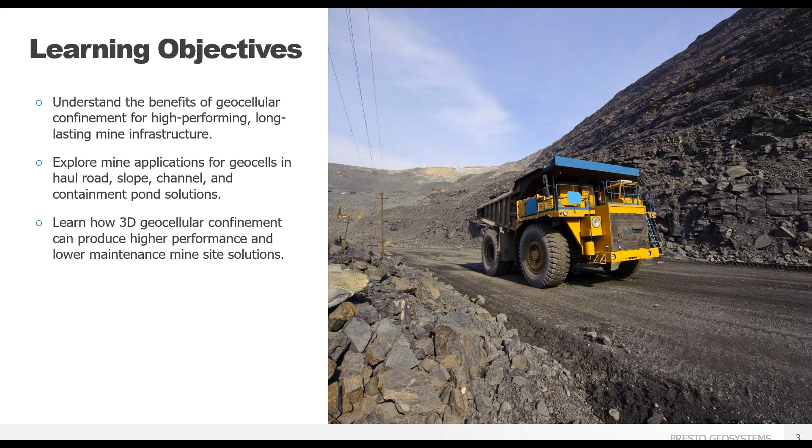The 3D GeoWeb cellular confinement system is perfect for the mine industry as it stabilizes unstable soils vertically and horizontally in the applications of load support, slope protection, channel armoring, and earth retention.

Today's presentation will focus on permanent and economical solutions with the GeoWeb system for a number of challenges facing the mine industry: stabilization of soft soils for access to site and haul roads, control and contain rainwater, protection of geomembranes in basins, tailings, and leach pads, and reclamation of slopes at mine closure.

Through 3D confinement and by strengthening the fill, less material is required and waste rock can be beneficially reused on site. The GeoWeb system offers improvements in operation, maintenance, installation, and safety at a lower total cost, giving your mine site some powerful value engineering solutions.

The GeoWeb system is our version of geocell technology and consists of two main attributes. The first is the cell size. The cells come in three diameters: small, medium, and large, and varying cell depths. Cell sizes are selected following an evaluation of project-specific needs and site conditions.

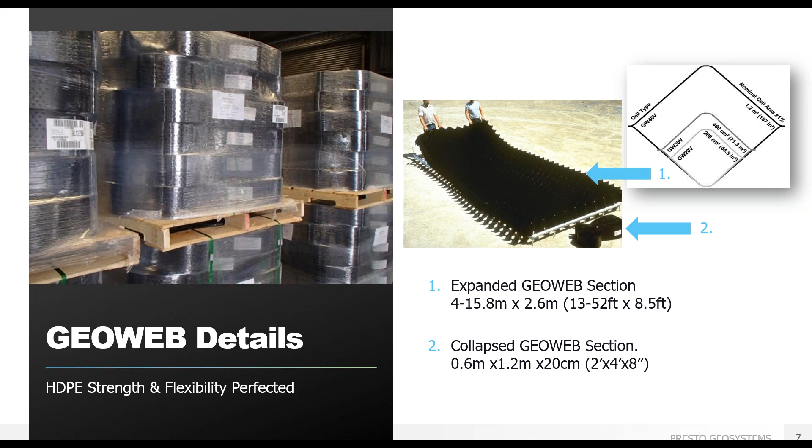The infill, or what you put into the container, is the second important attribute of a GeoWeb system. An important benefit is that low-quality aggregates, sand, or on-site reclaimed material can all be used to infill the geocells. Using reclaimed sand or aggregates can save a significant amount of money on materials and transportation costs.

We can also remove fines if drainage is desired, as the geocells provide the confinement and aid compaction of cohesionless soils. Without fines, we can significantly improve drainage and let water flow freely through the system, preventing pore pressure buildup and overall cross-section failure. The ability to use these low-quality sands and aggregates with friction angles in the 20-degree range really sets the GeoWeb system apart from geogrids and other geotextiles.

Those products require high-quality materials with high friction angles to achieve their optimal performance. With the GeoWeb system, materials with low friction angles are fine, as the GeoWeb panels reach their full potential even with these poor materials and can provide significant cost savings. As a value engineering option, the GeoWeb system can often reduce the cross-section required by half.

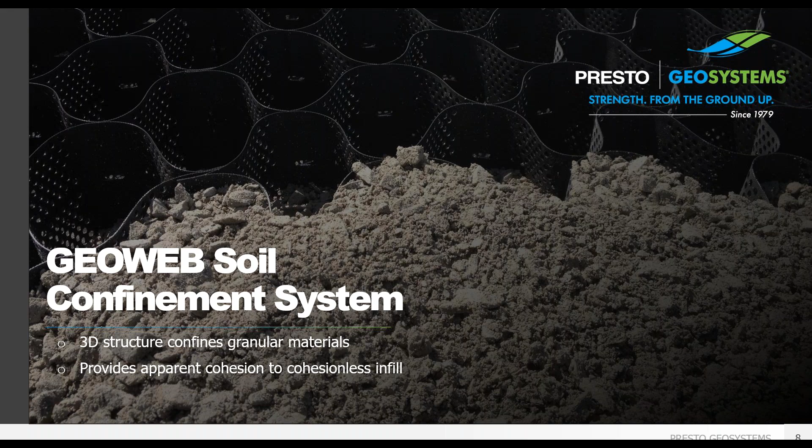The three primary elements of any geocell system—cell walls, internal junctions, and connectors—must perform uniformly as a complete system. So any incremental improvement in one characteristic, like cell wall stiffness or ESCR, is only valuable if a complementary improvement has been made in the other components of the system.

GeoWeb is manufactured using a proprietary blend of high-quality virgin high-density polyethylene, and our proprietary formulation has stood the test of time for over 40 years. For most typical sites, GeoWeb will retain its durability for greater than 100 years, with lab testing indicating 149 years without degradation, even at full exposure to the elements. We stand behind our numbers so you can deliver certainty in the solution and build with quality materials you can trust.

Made from high stability, inert materials, GeoWeb geocells are your permanent stabilization solution and will not degrade, leach, or release microplastics into the environment. GeoWeb does not contain any intentionally added PFAS, and based on this understanding, GeoWeb is not expected to pose a risk of release of PFAS compounds into the environment.

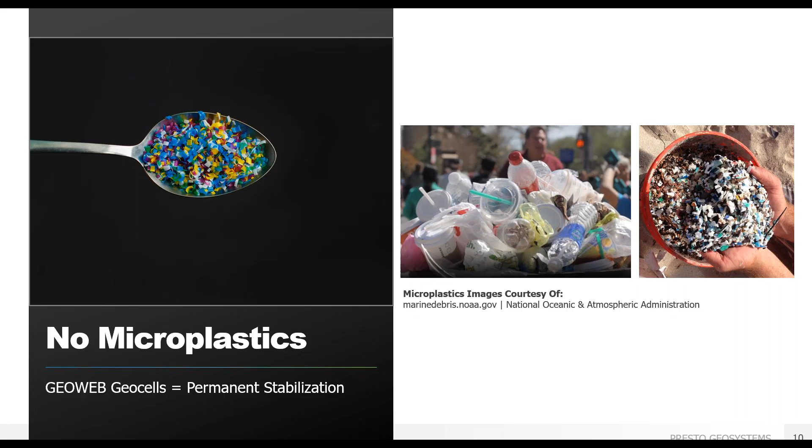Our base resin is the same material used in environmental applications like geomembranes and other environmental barriers to protect against the spread of harmful toxins. And our products have been third-party tested by accredited geosynthetics laboratories, confirming long-term stability against environmental factors such as weathering and oxidation.

Additionally, GeoWeb and our accessories are 100% made in the USA under strict quality assurance and environmental control processes, sure to comply with all requirements for the Build America, Buy America, and the Infrastructure Investment and Jobs Act.

Presto's GeoWeb system is equipped with numerous design and construction components that increase strength and speed of installation, each of them with specific strength values, so calculations and modeling replicate real-world forces, and the solution is designed for the project needs instead of as a commodity one-size-fits-all product.

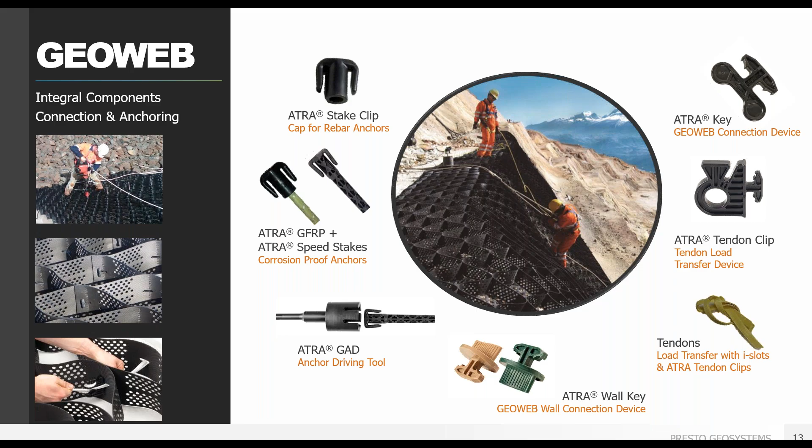These system components are all the supporting pieces that help the GeoWeb protect the surface and base layers, and also ensure relatively uniform performance of the interconnected system, thereby protecting against damaging effects of non-uniform deformation and differential settlement in response to applied loads. These components make it safer, faster, and easier for installation.

The ATRA key is the first component for a completely integrated system, connecting each individual panel of GeoWeb into a single web that covers your slope or channel. It allows for a faster installation of the GeoWeb and will last the lifetime of the project, ensuring your slope is protected and the GeoWeb system will not fail under anticipated loads.

The specific engineering values of the ATRA key will ensure the system holds up to loading over time without corrosion, as seen in staples, or the failure of underperforming cable tie systems. Our spec sheet calls out specific engineering values for this patented connector, and the ATRA key requires no special tools, generators, or compressors, nor any three-handed acrobatics like cable ties or two-piece connectors. All the ATRA key power with a simple insert and turn positive connection.

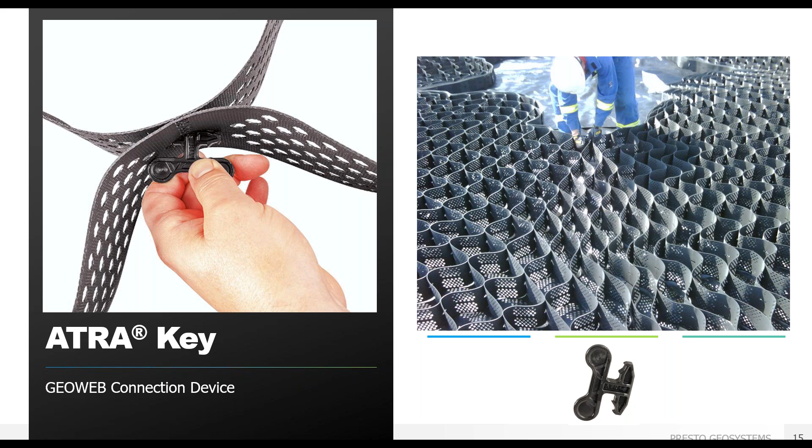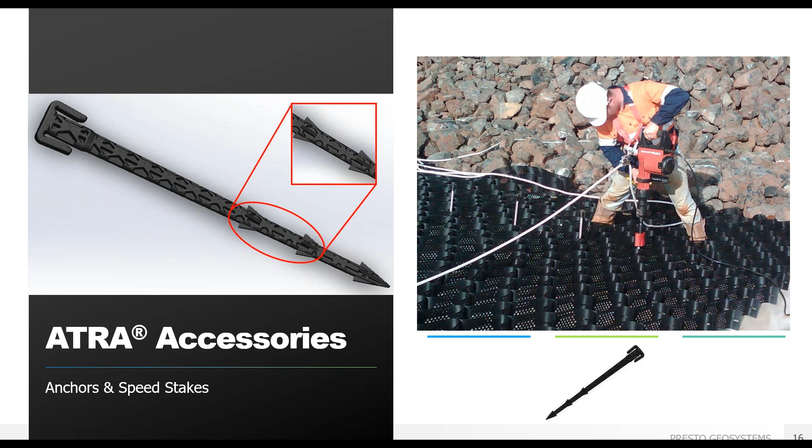As slope angles increase, the driving force of your infill material exceeds the available frictional resisting force, and additional anchorage is required. The ATRA anchors hold the GeoWeb to slope and penetrate into the ground. If corrosion resistance is required due to project conditions, Presto has an HDPE ATRA speed stake designed to work with the GeoWeb and offer higher resistance to extraction than rebar or J-hooks.

For steep slopes, a slope where the native soil is highly erodible, or over a surface that cannot be punctured, such as a liner, tendons can be used. The ATRA tendon clips transfer the load from heavy infill material to the tendons and to the crest anchorage system. Only the ATRA tendon clip is specifically designed to fully transfer safely and securely the forces placed upon the geocell.

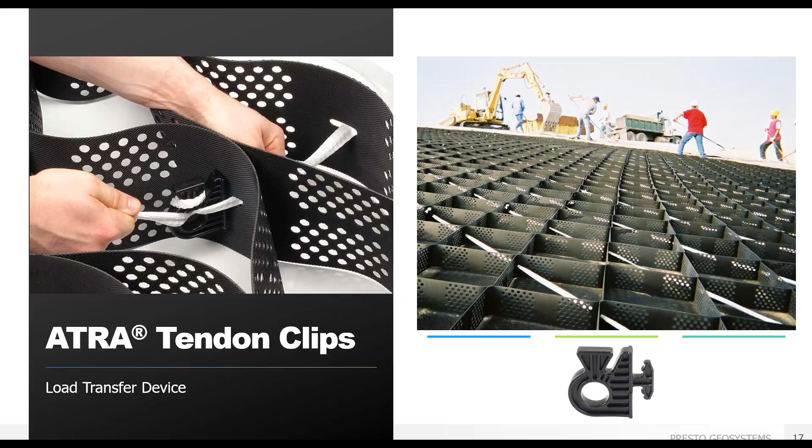Every accessory and every feature has been designed and tested to specifically work together. So we go from problem to design to construction solution with a system where the modeling replicates real-world forces. Now let's talk about how to take advantage of the benefits of geocellular confinement. The first application we'll highlight is load support.

The GeoWeb system stabilizes unstable soils vertically and horizontally, and in load support applications offers various benefits for mine clients.

GeoWeb geocells were invented for supporting heavy loads over soft soils, the perfect solution for haul roads in mine installations. Before giving specific examples with case studies, first we'll explain how and why geocells work so well for load support.

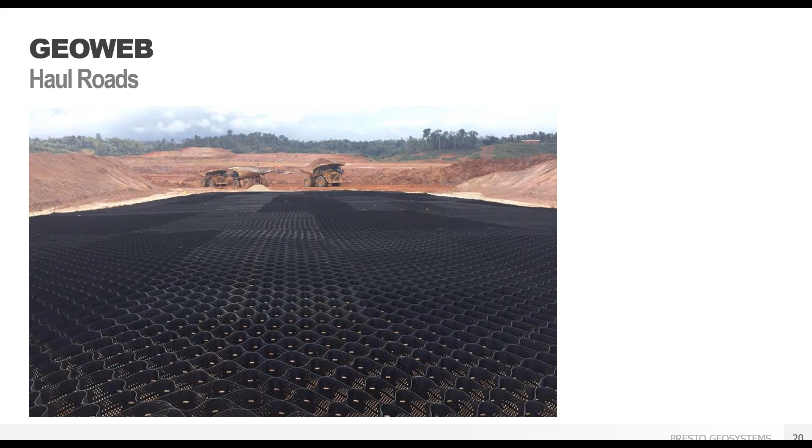GeoWeb was invented for solving a military problem: how to cross beaches with heavy military equipment. The Army sought a quick to deploy road solution, and a Presto engineer, Gary Bach, collaborated with Steve Webster of the Waterways Experiment Station to weld strips of polyethylene and form the first geocells.

The system evolved to include UV stabilization and other improvements such as perforation, texturization, and connections, but the concept of geocellular confinement and the particular strength properties of HDPE have been proven over 4 decades of GeoWeb load support. Likewise with the use of low quality and low friction angle infills.

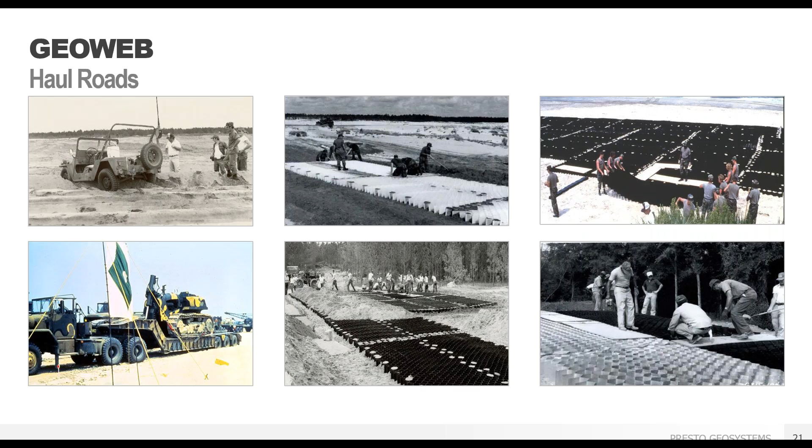This mattress effect reduces the stress reaching the subgrade and leads to a significant decrease in deflection and rutting. Let's get a bit deeper into how that works.

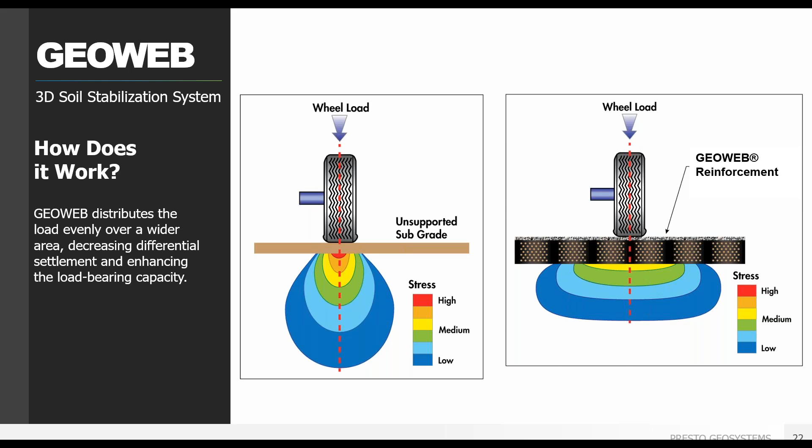GeoWeb geocells can alter the geometry of a soil pressure bulb beneath an applied load through this mattress effect.

When a load is applied to a geocell reinforced layer, lateral earth pressures develop within the infill material, which is confined laterally by the geocell walls against movement, and in turn develop upward shear resistance along the wall interfaces through the interconnected network of cells. In essence, this lateral confinement converts horizontal earth pressures into upward resisting shear forces.

When combined with suitable base reinforcement, such as an enhanced woven geotextile, it becomes possible to construct over very weak subgrade materials, including those with standard penetration resistance values less than 2 blows per foot, which is a CBR value less than 0.5%, where most planar geosynthetic products, such as geogrids, would otherwise fail.

When a vertical load is applied, those active earth pressures in the loaded cell push back against the passive earth pressure in the adjacent cell and form a stable system. Being confined, the soil responds passively.

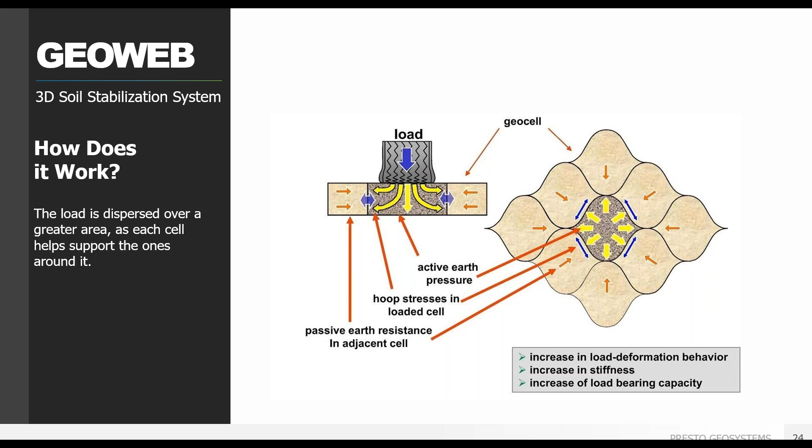By spreading out the load in a classic granular fill approach, you can reduce the compaction of near surface soils, but only with cellular confinement can you assure there's no lateral shifting, which leads to rutting. The mattress effect reduces the stresses reaching the subgrade, and by eliminating that lateral particle movement, the GeoWeb system can stabilize the surface, eliminating your need for constant maintenance.

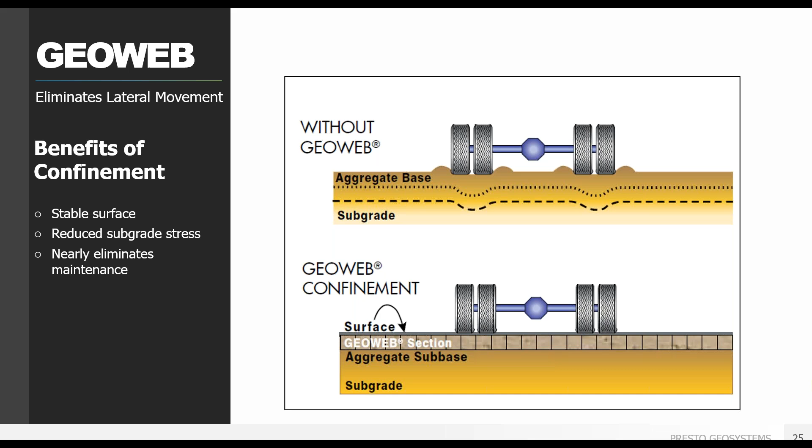We see how the cells push back against each other and support the load, and that only the adjacent cell needs to be filled for this support.

A great benefit to using the GeoWeb system is you do not need to have every cell completely filled before your road is usable. This can reduce construction time and materials, using the road as its own access point for construction.

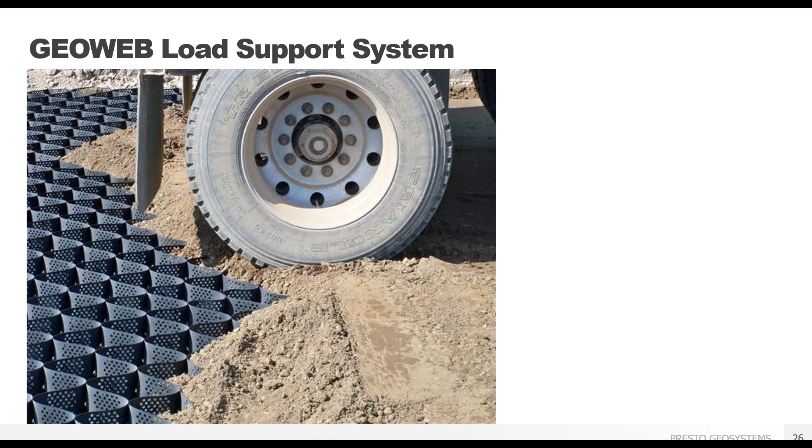GeoWeb provides a system with less rolling resistance, less required maintenance, less expenses needed for fuel, and less structure required to support those loads, all with better production, better cycle times, better operational costs, and a better installation.

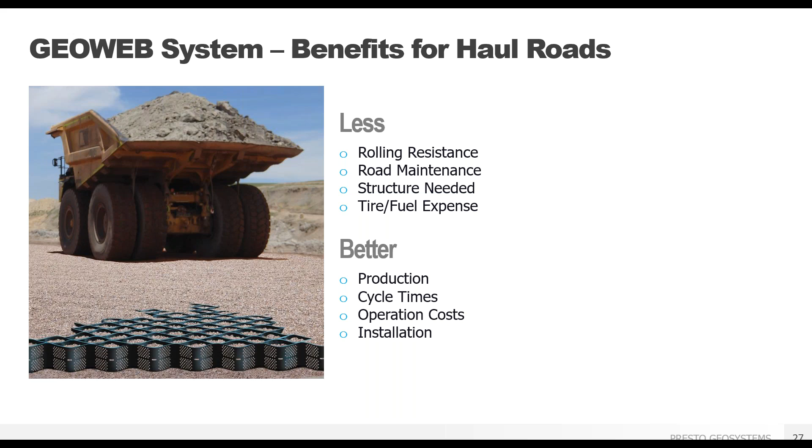A great value engineering solution for your site access and your haul roads.

The 3D structure functions well in remote areas where clean aggregate is scarce. Compact GeoWeb sections ship efficiently to your job site and require less trucks to transport materials.

On-site sand infill is used so that costly aggregates won't be necessary. Nearly any locally available granular infill, sand, and even waste rock can serve for the GeoWeb geocells in your projects.

In the majority of cases, the GeoWeb system can also reduce your cross-section depth by up to 50%.

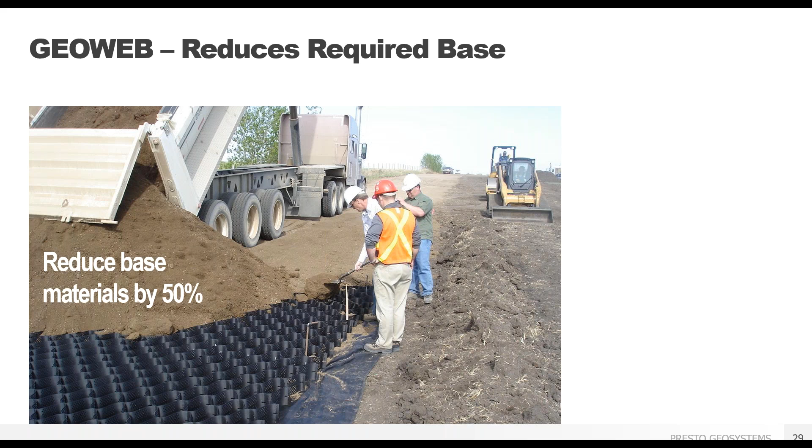GeoWeb allows stabilization with a reduced cross-section, making it ideal for underground haul roads.

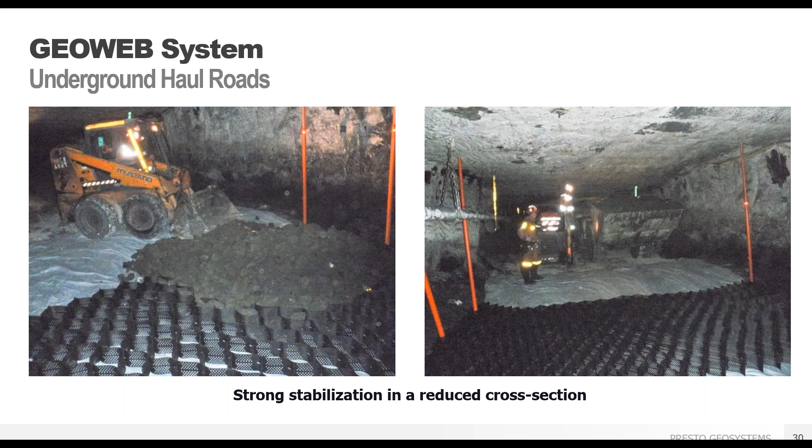Let's look at a specific example for a haul road in a case study. This case study is for a mine site in South America and is a great example of the power of geocells as a value engineering solution.

GeoWeb geocells were incorporated into the design of a haul road at an active mine in Suriname, with heavy loading over soft subgrades and local scarcity of quality angular aggregates as it was the mine startup. The prepared subgrade strength exhibited a California Bearing Ratio value of 2.5%, consisting of saprolite and clay.

Anticipated loading included CAT 785 haul trucks, 275-ton vehicles, and the haul road useful design life of 10 years at 250 movements per day. Surface loading calculated to be 151,750 pounds, with surface contact pressure of 101 pounds per square inch and 55% of the total 550,000 pound weight on the rear axle of the haul trucks.

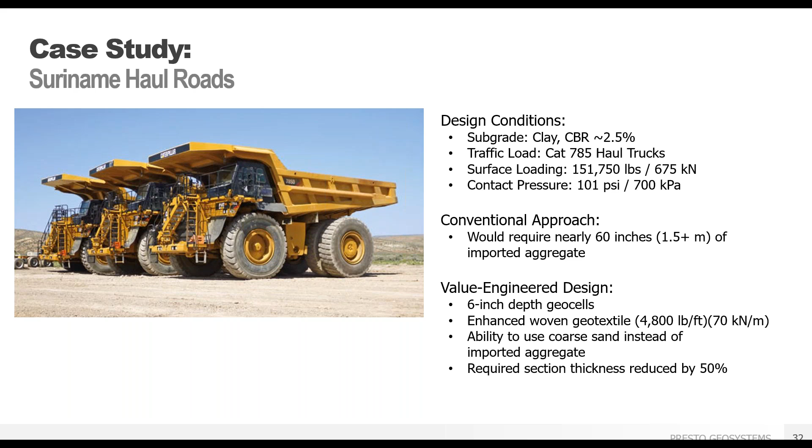GeoCells offered a value engineering design option with multiple benefits. The sticky clay soils made the road impassable with every hard rain, and adequate aggregate materials for a standard construction solution were not to be found.

GeoWeb geocells offered a value engineering option with just one 6-inch layer, or 15-centimeter layer, of geocells being able to support the heavy haul truck loading over soft subgrades and reduce the total thickness from 60 inches suggested by standard design guidelines to 30 inches.

GeoCells dramatically increase the shear resistance of the infill, which allows the use of lower quality fill to carry concentrated loads that would otherwise require crushed aggregate, and prevent localized near-surface shear failure.

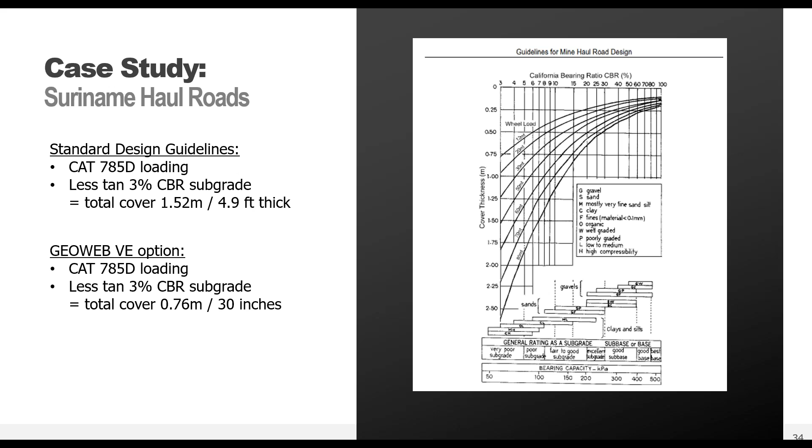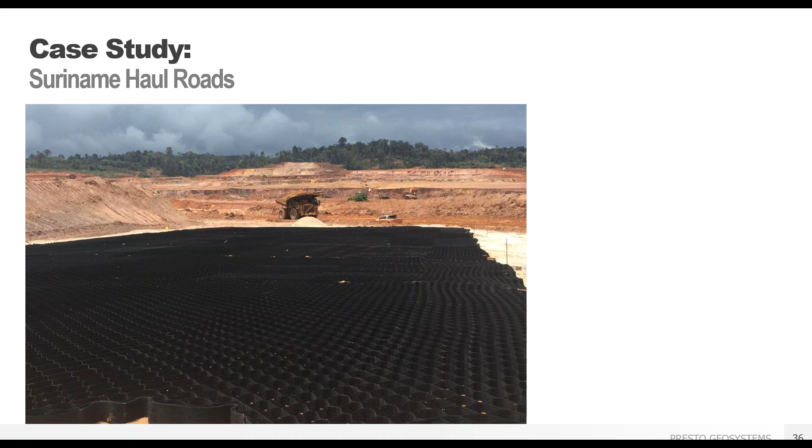And the GeoWeb haul roads function well, even with the hard tropical rains.

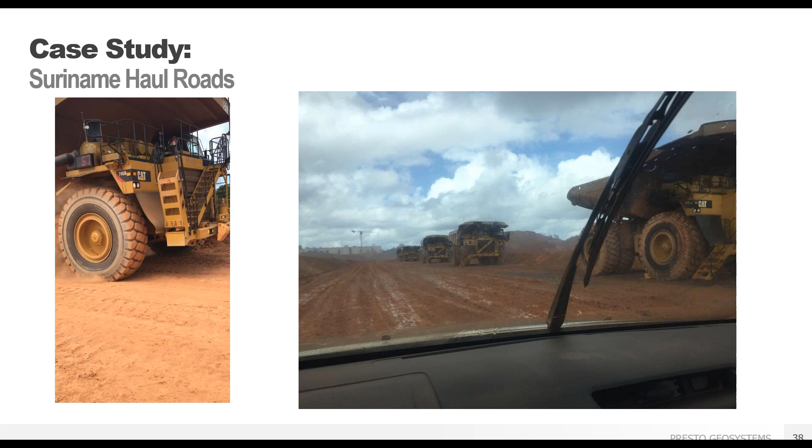The results of the GeoWeb installation offered notable benefits: a great reduction in the total cross-section needed, reducing it by 35% with a coarse sand wear surface and by 50% with an aggregate wear surface.

There's less vehicle maintenance and less fuel required, better productivity, and better operational costs with safer site conditions, and the expansion opened before the scheduled date and under budget. All in all, a very satisfied client.

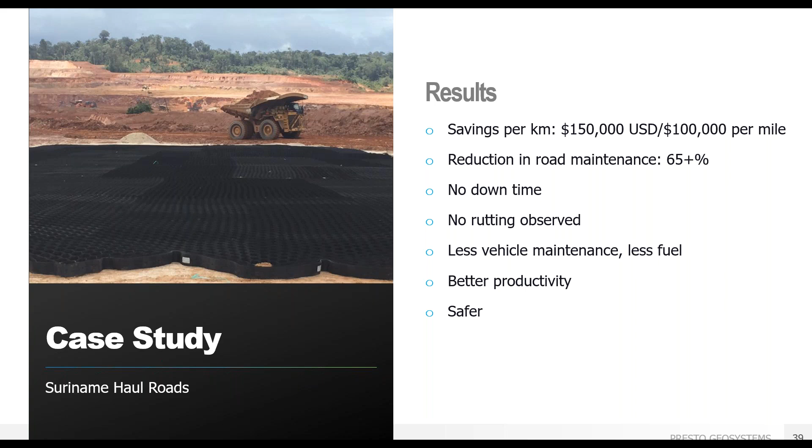Project calculations included an analysis of bearing capacity improvement to evaluate the combined benefits of lateral confinement from the geocells in conjunction with the tension membrane effect of the underlying high-strength woven geotextile, to confirm the proposed approach would meet all the design requirements. The analysis indicated the stabilized section would offer a substantial increase in the allowable bearing capacity over existing subgrade conditions.

Without the geocell system, it would only have an allowable bearing capacity around 20 to 30 psi at best.

An analysis of hoop stresses under the working loads was also performed to verify the geocell system components would be able to withstand the demanding load requirements. Hoop stresses were compared to the ultimate tensile strength of the perforated cell wall, as well as the strengths of the internal and the mechanical junctions.

In the case of the junctions, ultimate strengths for all three primary modes of potential junction failure—shear, peel, and separation or splitting—were compared to the fully developed hoop stress under working loads to calculate factors of safety for each mode. For the cell wall, the factor of safety against cell wall rupture was also calculated.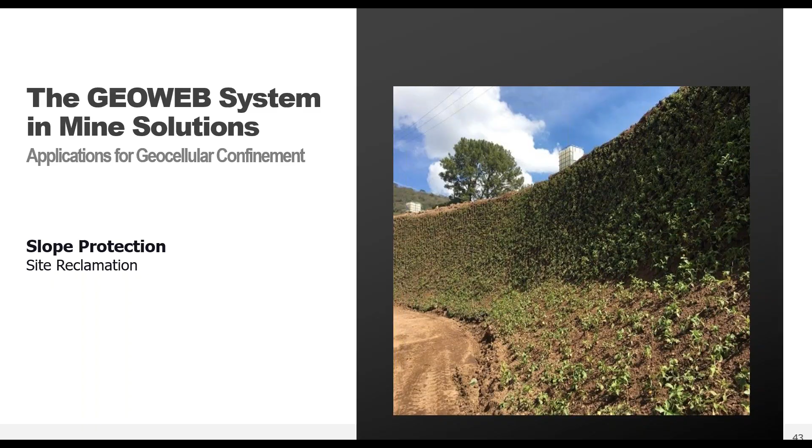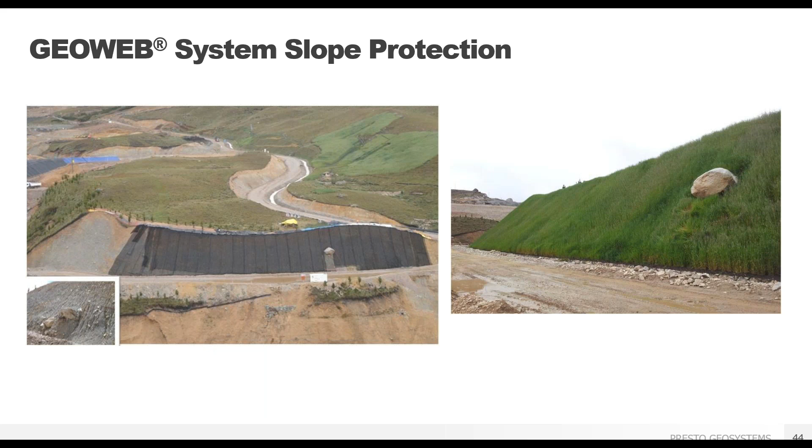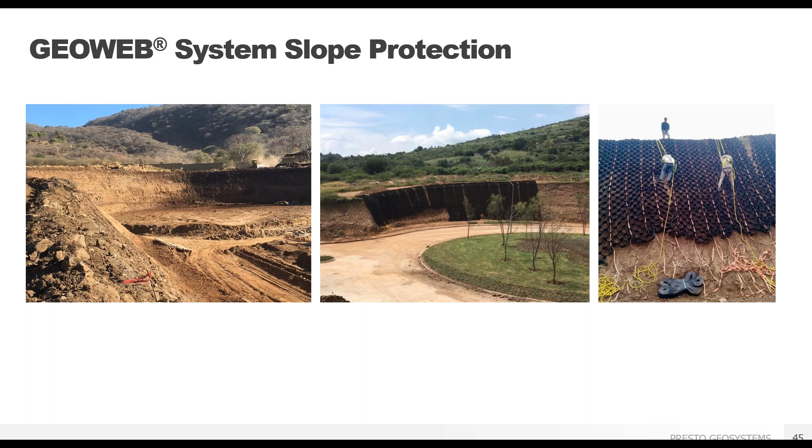The GeoWeb system allows flexibility in a mine slope reclamation solution, and GeoWeb allows vegetation of tall, steep slopes—very steep slopes.

GeoWeb also allows you to suspend a protective layer to vegetate or hard armor over geomembranes without the need to perforate the liner for your anchor system. And as we see here, it's able to sustain vegetation and control erosion as part of that protective layer.

Here's another example of the GeoWeb system with tendons over a geomembrane.

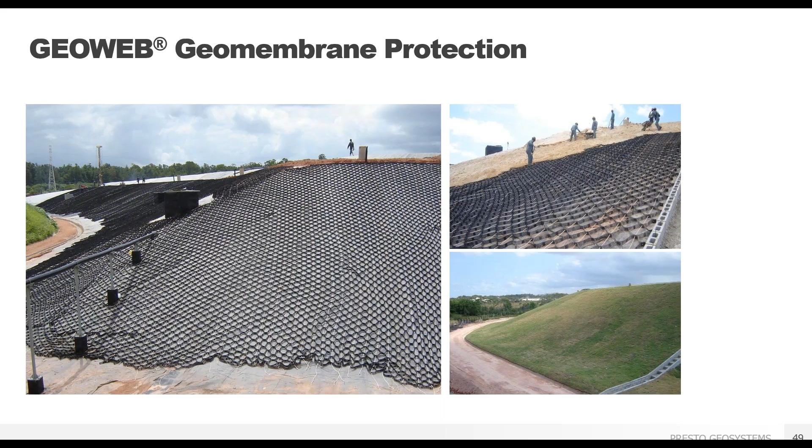The anchor system with ATRA tendon clips allows for a safe and strong installation without the need for stakes or perforation.

The ATRA tendon clips transfer loads from the geocell wall to the tendon, and the tendon to the crest anchorage. Here we see a typical crest anchor as a dead man pipe with the yellow tendons connected to it.

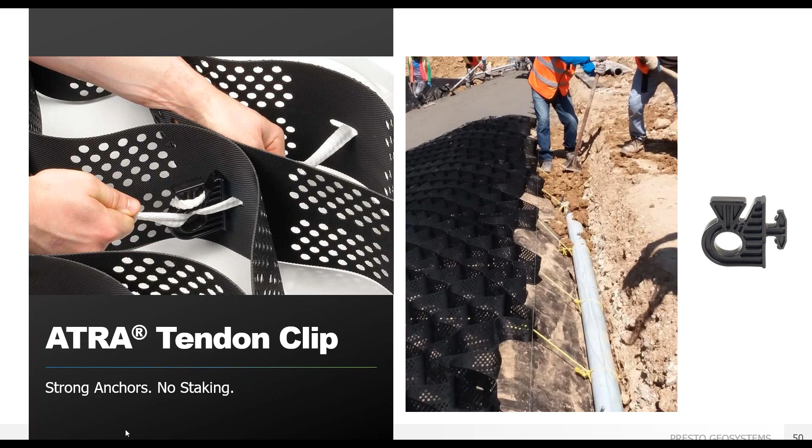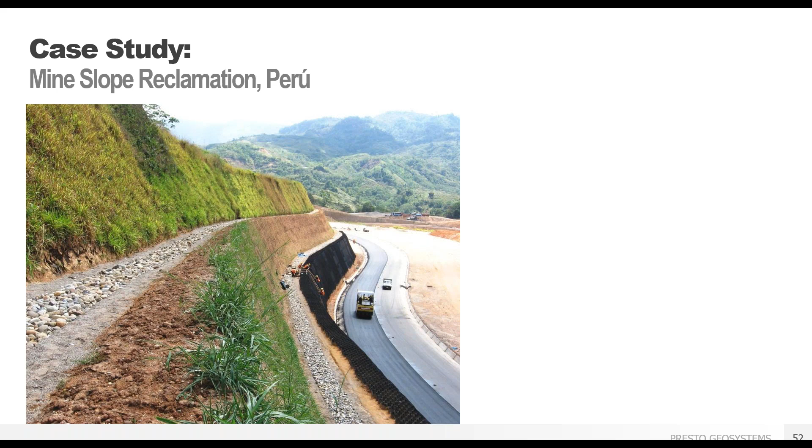Next, we have a case study to share for mine slope reclamation, this one in Peru. As we can see, the slopes are very steep, and their cut slopes have angles greater than 70 degrees with much erosion.

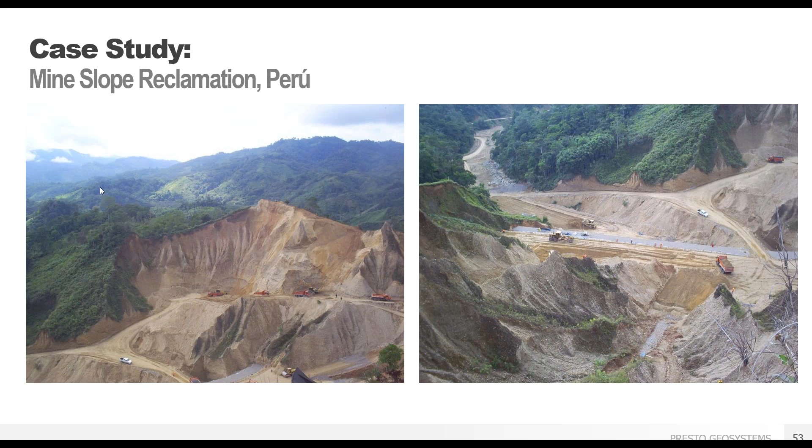A complete and complex solution was required, including in this case the design and construction of integral rainwater channels with energy dissipators, all with the goal of managing stormwater and preventing slope erosion with little to no maintenance long term.

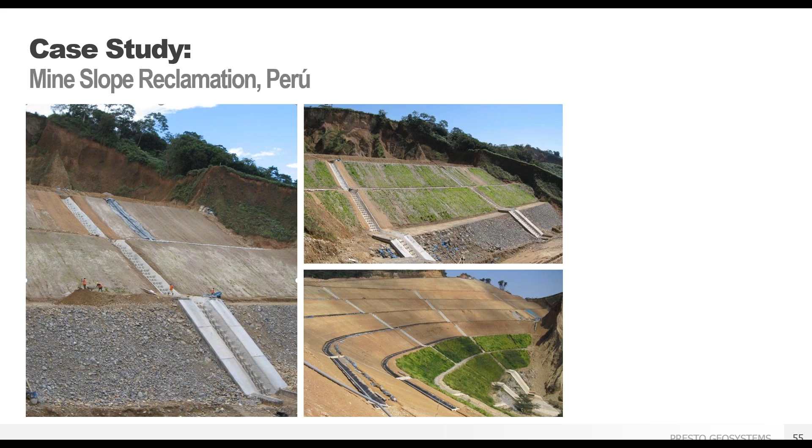Long-term protection, and a complete solution to control erosion, reclaim mine slopes, and control stormwater, thanks to the GeoWeb system.

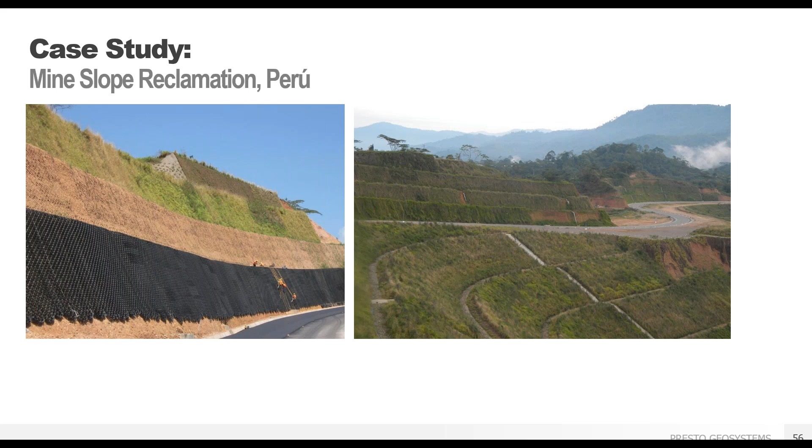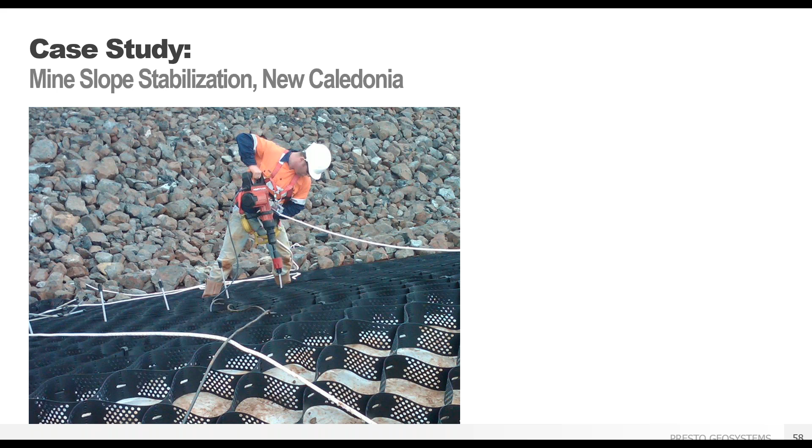The system has to stand up to extreme weather events, including cyclones with heavy rains, 24 inches in 24 hours, and also strong earthquakes of magnitude 7 in the region. All this with 45-degree slope angles.

And here, with the infill placed, using on-site waste rock from the mine, we stabilized all the slopes with GeoWeb geocells.

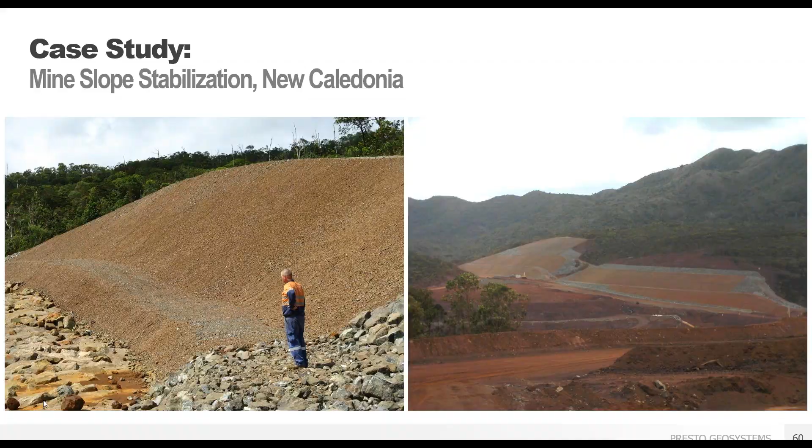We saw an introduction to GeoWeb channel protection in the previous section, and now we'll detail the GeoWeb mine channel protection system.

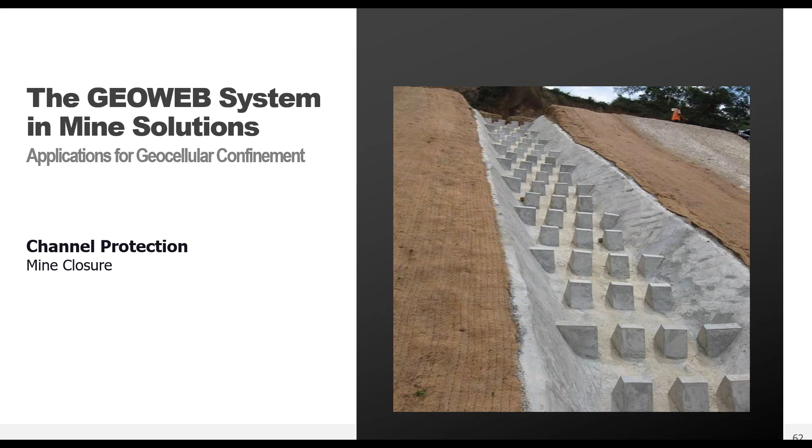The process for building up a channel protection goes something like this. To begin, we have our channel with standard dimensions and side slopes. Depending on the infill, a geotextile separation layer may be required.

We have two options for anchoring. First is using ATRA anchors or ATRA speed stakes. These are placed along the channel and at the crest. The second is to use tendons and a crest anchorage system, so all the anchorage is at the crest of the side slopes or embankment, not along the channel face.

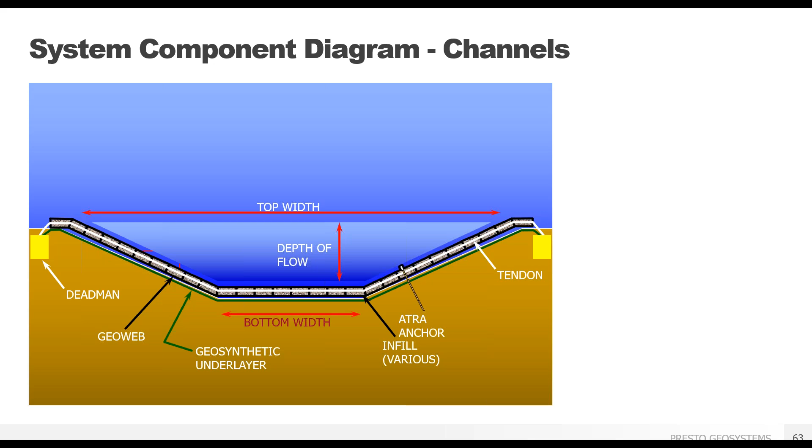The use of the 3D GeoWeb channel protection system is much more effective than two-dimensional solutions that are subject to scour. The fill material that is confined in each flexible cell is protected against erosive forces, making the entire channel or embankment more stable. 2D solutions such as erosion control blankets or cementitious blankets do not protect the channel from

the hydraulic forces of the water, so the channel can fail even with these 2D protection systems in place. Those 2D alternatives are also prone to uplift and won't allow any excavator cleanout or other long-term maintenance.

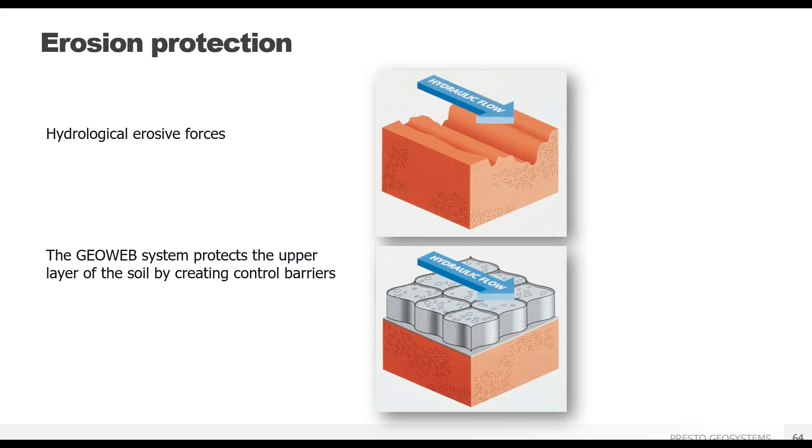The GeoWeb channel protection system provides protection with a variety of anchorage and infill options to best suit your project needs. Here we see channels with vegetated infill, aggregates, and concrete.

Cellular confinement improves the hydraulic performance of conventional channel protection materials. Presto has done extensive testing with the hydraulics lab at the Colorado State University, and their lab has a static drop of over 80 meters or 260 feet for nearly limitless flows through their lab flumes.

The CSU tests gave us formulas to calculate solutions for flows in vegetated GeoWeb channels up to about 9 meters per second or 30 feet per second, in aggregate channels reducing rock size by 2 to 10 times compared to riprap or the Abt and Johnson or U.S. Army Corps of Engineers methods, and in concrete channels with flows of more than 11 meters per second, over 36 feet per second, with the GeoWeb system surpassing the flow limits of the lab flumes.

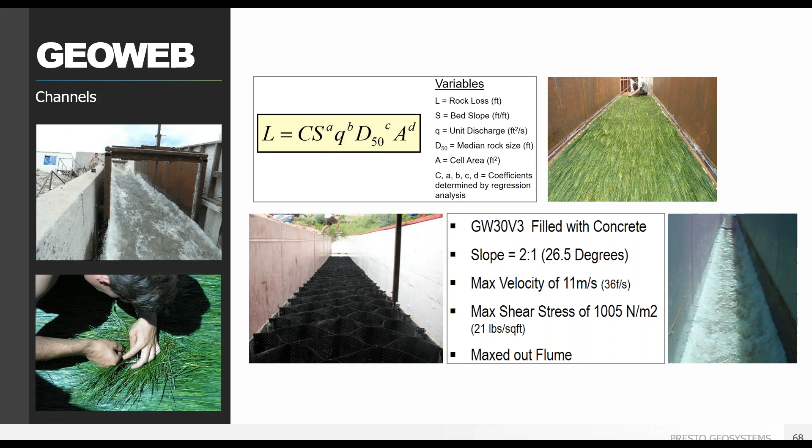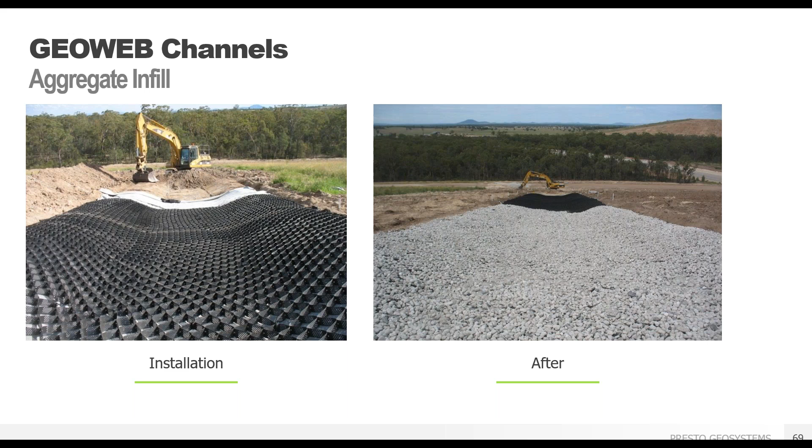Vegetated channels are not typical solutions for mine installations, and aggregate channels are often used for very mild slope installations, like this example of an outfall channel for Rio Tinto, or this example with shallow embankments in Arizona.

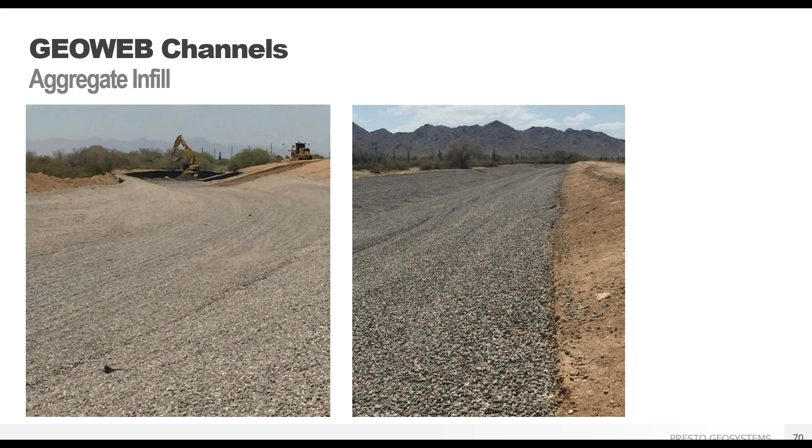The GeoWeb channel infill can be waste rock, readily available on site, and less costly than importing fill.

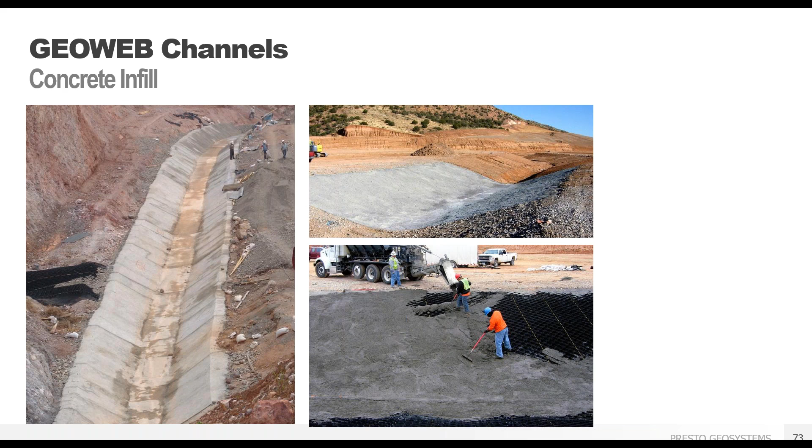For extreme flows and a permanent worry-free solution, concrete infill is recommended, as used in this spillway in Peru, and these remote site installations for San Andreas and Tyrone. There are many concrete GeoWeb channels at the Yanacocha mine.

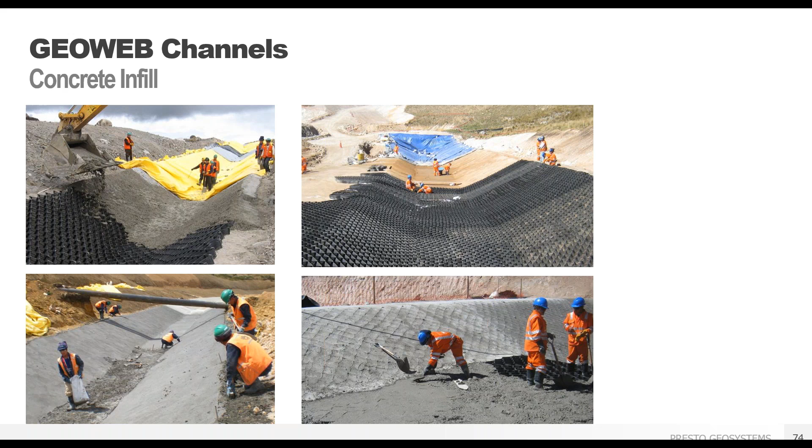And it's worth a comparison to traditional methods. Traditional methods often open the possibility to failure points, in addition to their longer construction times. If there's any differential settlement or seismic activity along your channel, an inflexible solution should not be chosen.

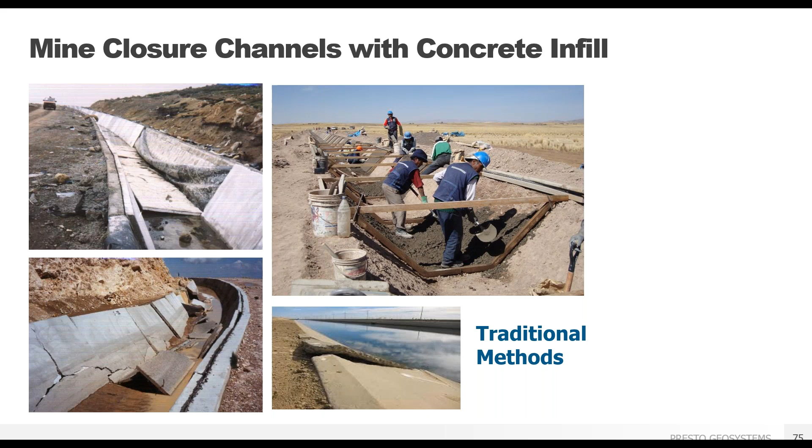We're going to look at a case study for a high flow mine channel in Guatemala. GeoWeb allowed for a resilient and fully armored seamless channel without the need for expansion joints and the potential failure zones seen with traditional poured channels, all with a reduced cross-section.

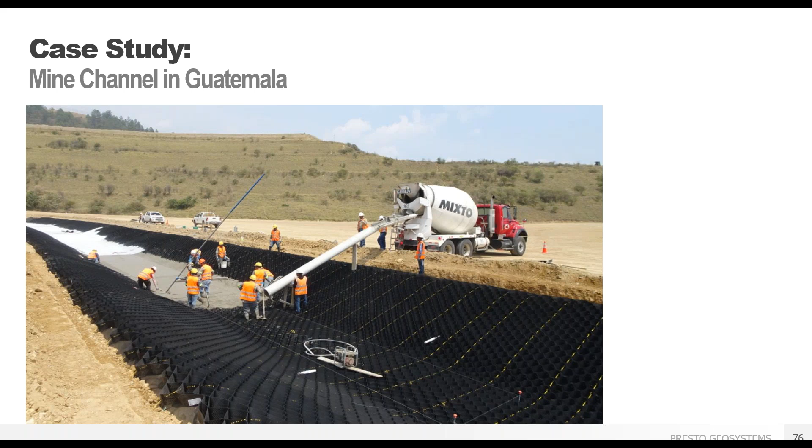GeoWeb geocells can be incorporated to handle high-flow stormwater in remote locations, and their long-term resiliency makes them ideal for mine closure applications where environmental restrictions hold sites to consistent and permanent high performance, yet site access often only allows for occasional monitoring post-closure.

Expanded durability standards are especially important with increased frequency of record storm events, and if either seismic activity or differential settlement is expected. As our case study will discuss, this mine site in Guatemala experienced record storms and strong seismic activity, and the geosynthetically enhanced channel armoring delivered consistent performance that stood up to the challenges.

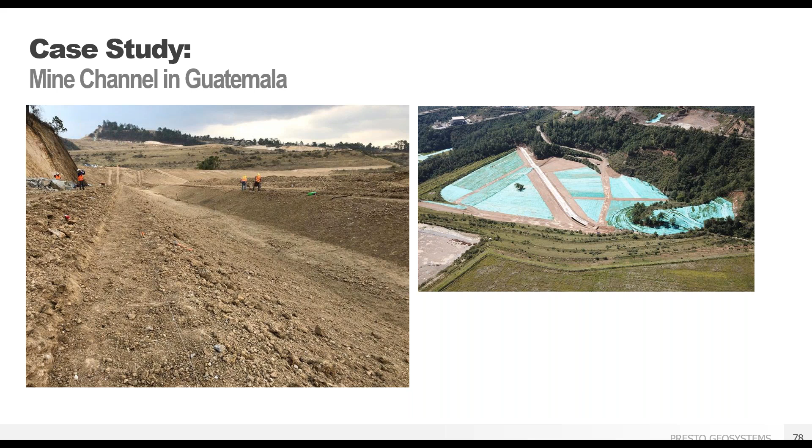The channel had anticipated hydraulic flow of 425 cubic feet per second, about 12 cubic meters per second, and a 16.86 feet per second, or 5.14 meter per second velocity over a length of 400 meters. There were rapids included in the channel, and the client wanted to allow for excavator entry as needed for future channel cleanout.

The mine site was originally considering an 8-inch reinforced poured concrete channel and looked to optimize design while maintaining a trapezoidal channel formation.

Design calculations supported a 4-inch geocell system to allow that excavator support, and the mine site preferred to compromise with a 6-inch depth for an additional factor of safety. This was still 2 inches thinner than originally budgeted, so already offered considerable savings in concrete costs.

The design included a non-woven geotextile as separation layer, 6-inch geocells, with polypropylene tendons and a load transfer system, and 4,000 psi concrete.

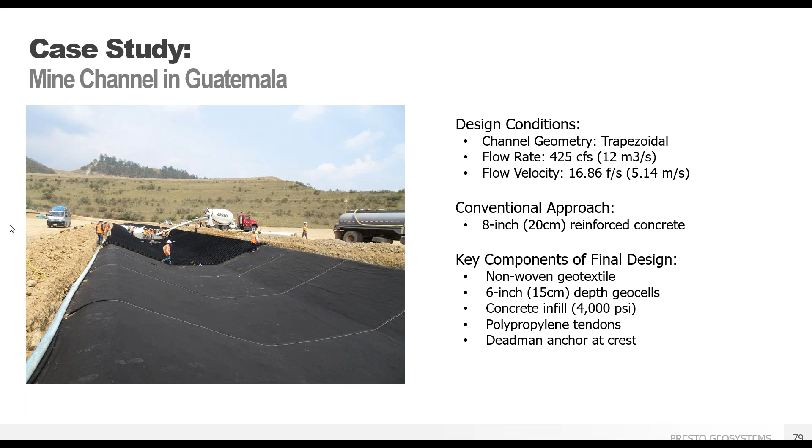The GeoWeb channel protection design incorporated our strong polypropylene tendons, ATRA key connectors, and ATRA tendon clip load transfer devices.

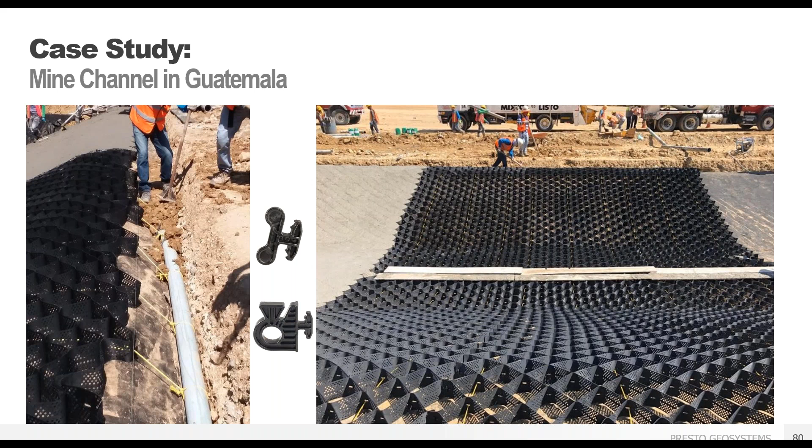First, the channel bottom was filled, and then the side slopes, working from top to bottom. Note the yellow tendons and the dead man anchor at the crest. These components are determined project by project based on the details of the specific channel needs. By doing the channel bottom first, workers were able to traverse the channel and allow easier access for the crew.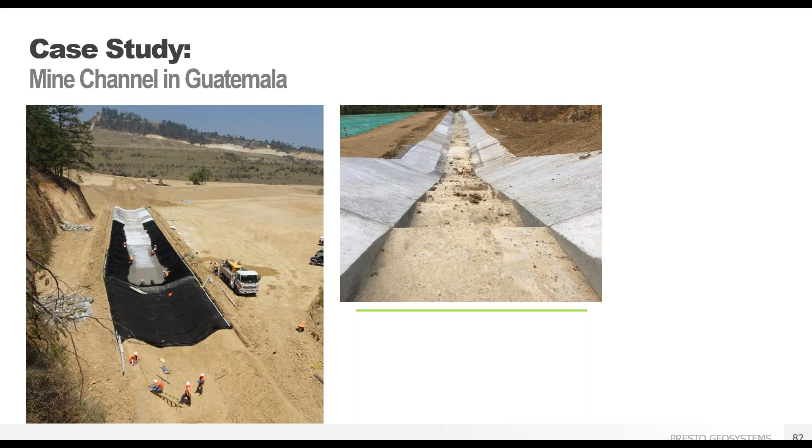Rapids were incorporated into this part of the channel design, with the GeoWeb geocells transitioning seamlessly into these step rapids structures. And here we have the joining of the rapids with the rest of the GeoWeb channel.

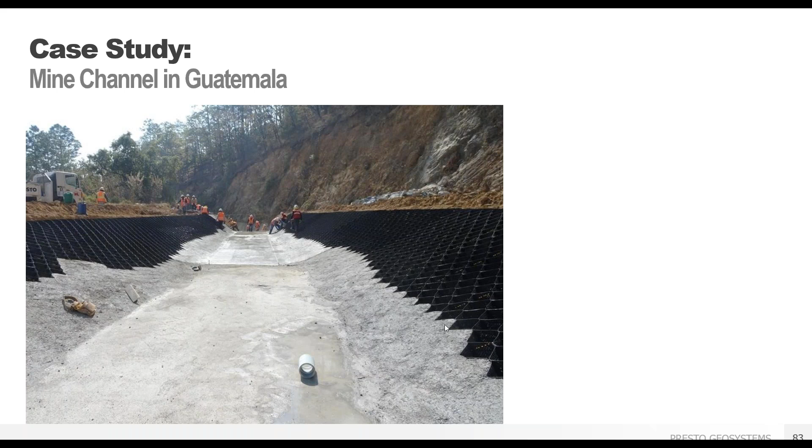The GeoWeb channel protection system allowed for a resilient and fully armored seamless channel without the need for expansion joints and the potential failure zones seen with traditional poured channels.

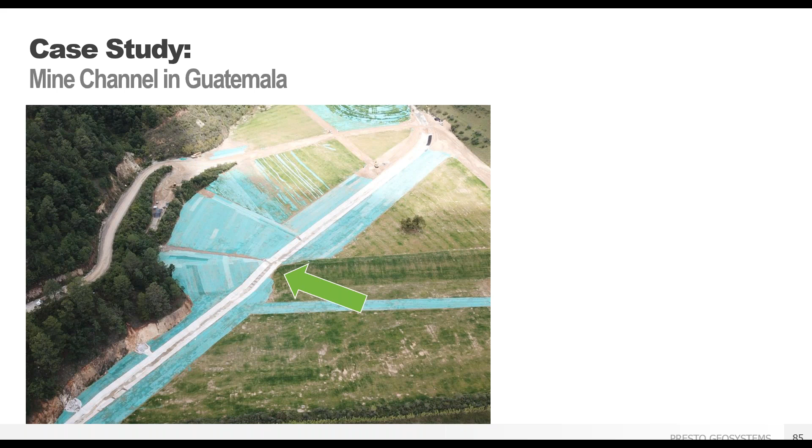The channel is now in its 6th year of performance without incident, even with record storm events and strong seismic activity in the area, with soil saturation, overflowing rivers, and even landslides.

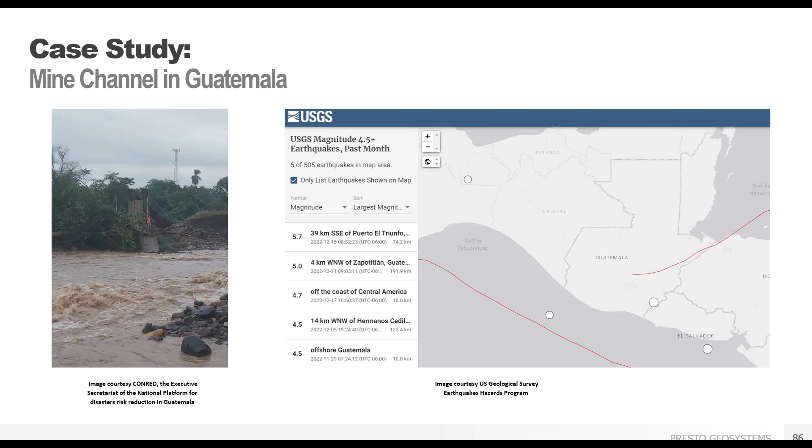Geocells with concrete infill have the long-term resilience and economy to be considered a best practice and are considered among the solutions with highest long-term performance results from the U.S. Bureau of Reclamation's 10-year canal lining study.

The GeoWeb system provides protection and flexibility, as shown in this mine closure channel in Mexico, using big riprap fixed in place with grout for a rockfall area.

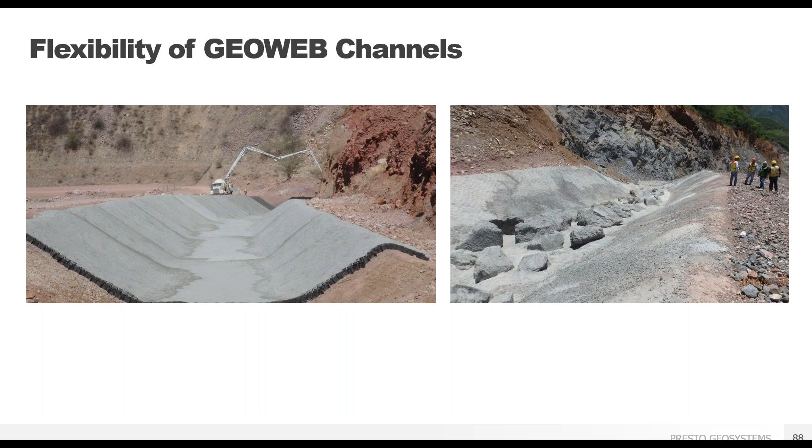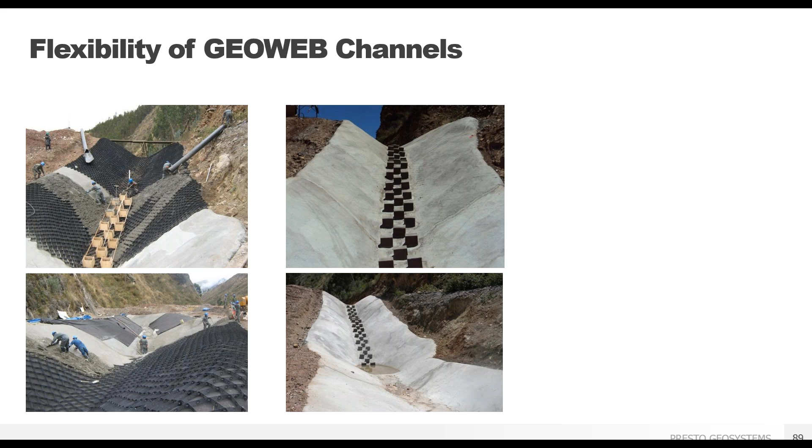Or with these rapids in a Peruvian mine installation, with various options for anchorage and installation, and various options for infill. All in all, a system of complete channel protection for your project needs.

The GeoWeb earth retention system can offer global stability and the support of surcharges, even with seismic activity and differential settlement.

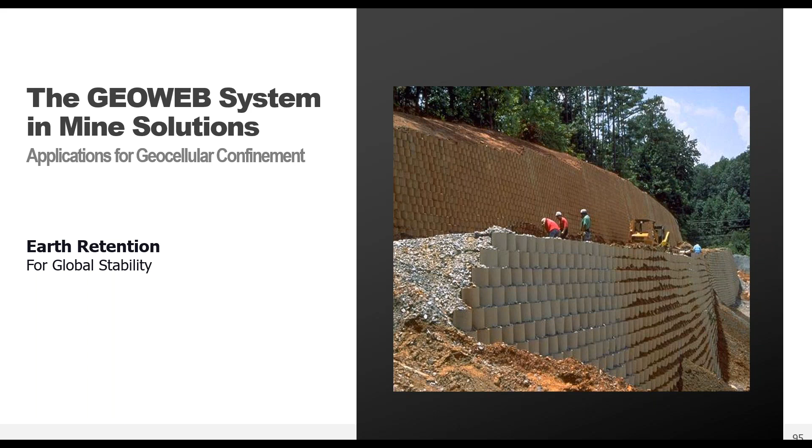Retaining walls serve to contain soils and protect utilities or storage tanks, and offer global stability for very steep slopes, like this example in Central America.

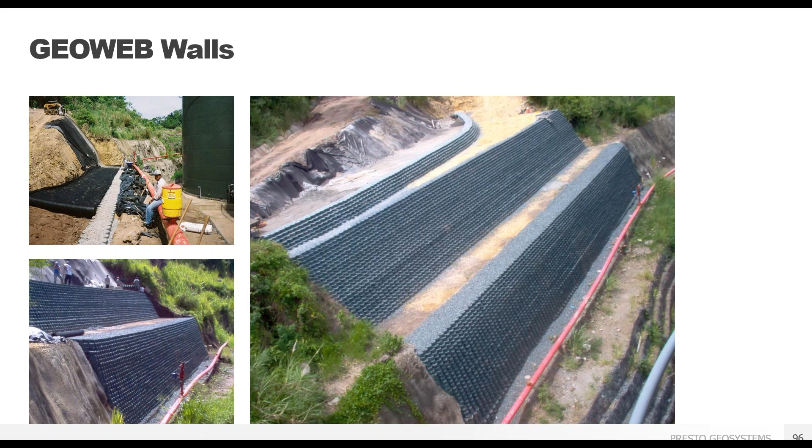GeoWeb walls also function as containment dikes with or without vegetation. Unlike traditional block walls, GeoWeb walls can withstand reasonable differential settlement, hydrostatic pressure, and seismic conditions.

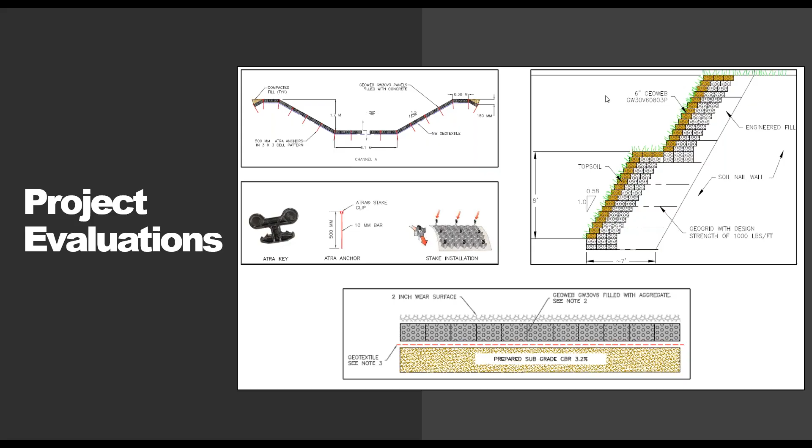I would also like to introduce a new web-based software, PrestoGeo P3, where you can plan projects yourself within this portal. This software offers a suite of geotechnical calculation tools designed to support engineers, contractors, and project owners in completing value engineering evaluations using GeoWeb geocells and GeoBlock and GeoPave porous pavements. Check out the software at prestogeop3.com.

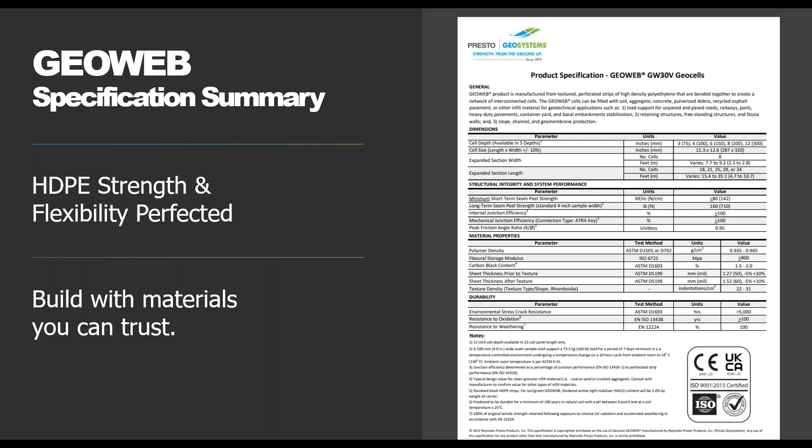One of the biggest questions we get is about cost, no surprise there, especially if this is new technology for you or your area. Having an idea of how much the GeoWeb system costs compared to other stabilization techniques is very important. Our case studies shared today hinted at some of that cost savings, and here's another look with a basic comparison for the GeoWeb system for a load support application, in this case, a gravel surface road.

This comparison shows the difference in both price and cross-section depth for an aggregate-only unreinforced section, a section using geogrids and geotextiles, and then two sections showing the use of the GeoWeb system, one with aggregate and one with salvaged on-site materials as the infill. You can see the GeoWeb system is both thinner and less expensive than the other methods, significantly so when on-site material is beneficially reused.

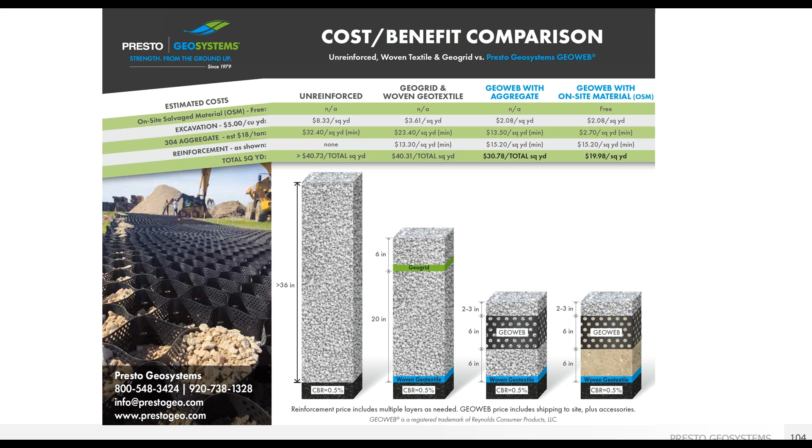About a 40% savings can be realized compared to the geogrid or geotextile section, which does not allow for the use of most salvaged or on-site materials, as a high friction angle, well-graded material is required with the use of grids and textiles. Of course, your aggregate costs and distance to quarries may vary, but this will give you a general idea of the savings that you can achieve. I invite you to use our P3 program and compare cross sections accordingly and cost it out to see the best solution for your particular project needs.